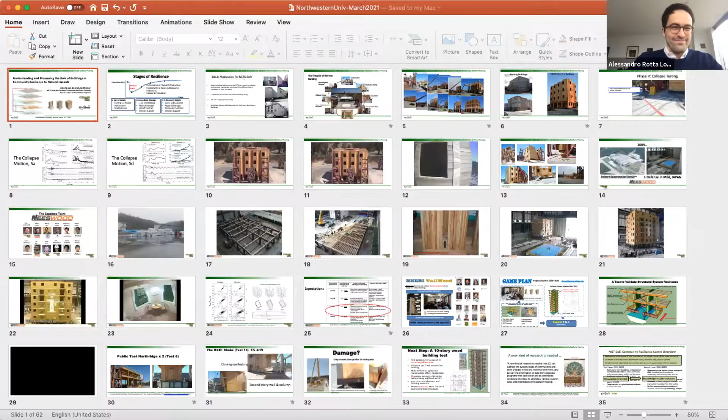All right, well, thank you for the kind introduction. And hearing that, I feel like I'm serving on too many committees now, so. Okay, well, thank you.

So I'm putting together a few subjects for today's seminar. I'll start with some of the NEESWood and NEES-Soft work, and the performance of buildings, and then move into community resilience and really talk about some of the work that's been done by the center. So a lot is my work, some is not. I'll try and distinguish that as I go along.

So I want to start with the stages of resilience, and these may look familiar. Certainly this curve that you see, and hopefully you can see my cursor here, the functionality. Obviously, if you're retrofitting or actively improving your community, then this could be going up, and then your drop is less substantial during a hazard, whether it's an earthquake or a tornado.

And within community resilience, we study all of these stages, and that's the immediate damage, which sets the initial conditions for the recovery stages. And those recovery stages become more social and economic, repairing, recovering, things like that.

So I want to jump back what seems like a fast 8 years, to the NEES-Soft project, whose full title was Seismic Risk Reduction for Soft Story Wood Frame Buildings. And this came about as a result of buildings that were built in the 20s, 30s, 40s in the Bay Area, around the San Francisco Bay Area. And locally, they put in place CAPSS, or Community Action Plan for Seismic Safety.

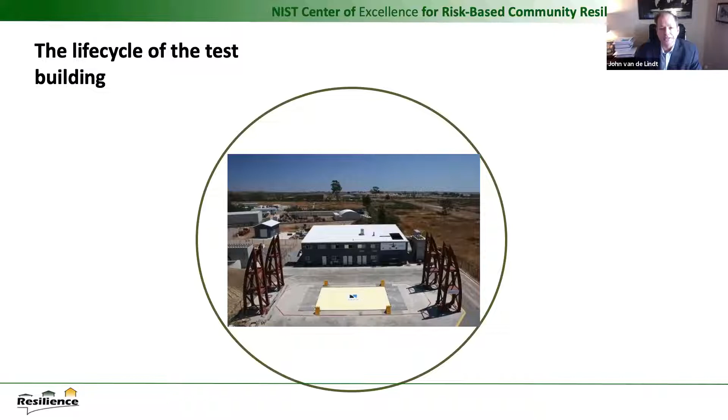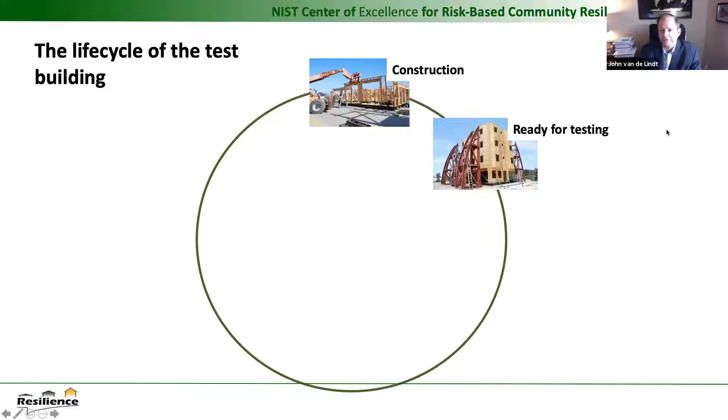There were 5 different tests, but ultimately we did a large test program at UC San Diego. That's the largest shake table in the US. And here you see this started with construction, and then ultimately ready for the testing. Cross-laminated timber rocking walls with one of the P807 retrofits. And I won't go through these in too much detail. I just want to show you the breadth of the project.

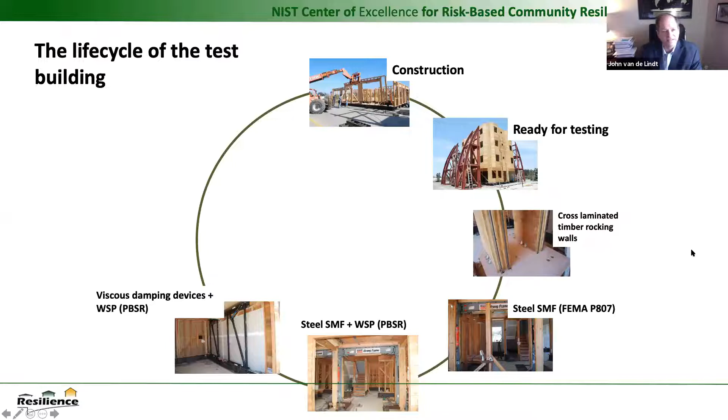The steel special moment frame. This was also what we call minimal level retrofit just at the bottom story. And then steel special moment frames plus wood structural panels. And various viscous damping devices. These were Taylor dampers, and then the frame was built by us. And then we performed collapse testing after we pulled out all the retrofits.

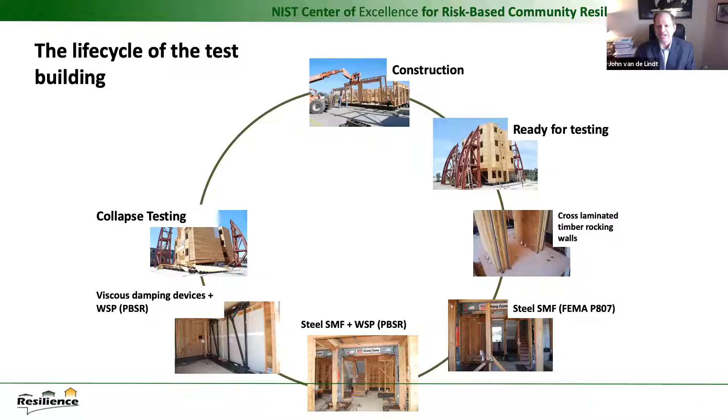And of course, I sometimes show the collapse testing first, and someone at one point had asked about the order, but obviously we do the collapse test last. And then recycling and disposal.

So just to show you the size of these types of tests, here you can see construction going up, prefabricating walls, and remember it's a soft story building, so you can see the opening, the 4 garage fronts on the bottom floor.

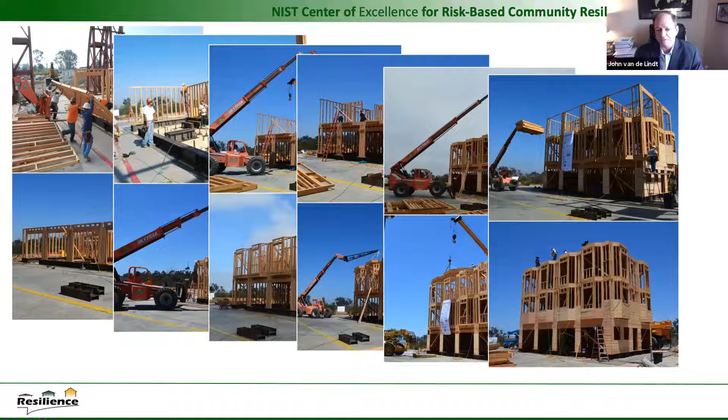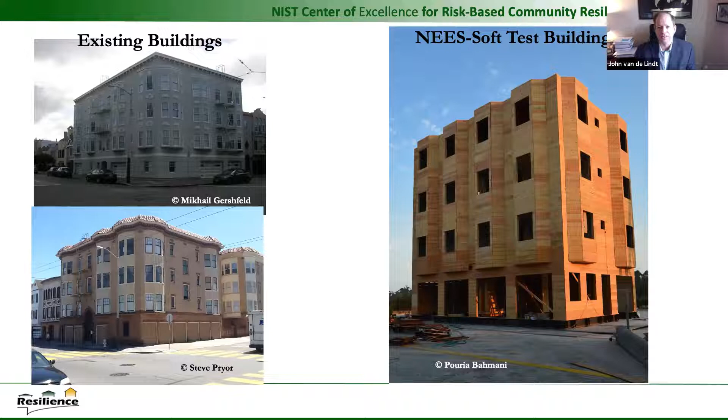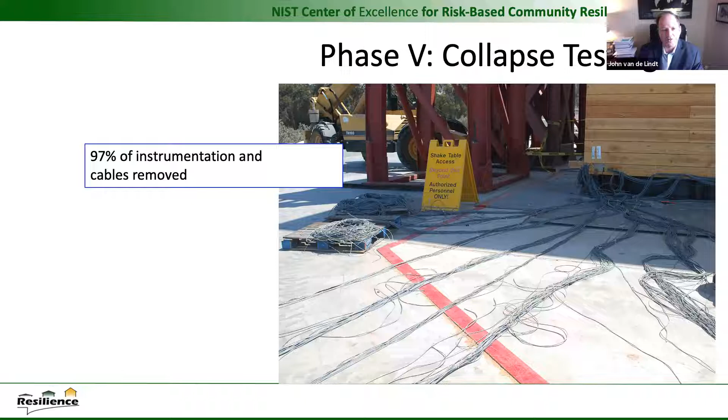So again, as I mentioned, I'm not going to show all the detailed retrofit tests. They were all very successful, but what I do want to show is the collapse test to show you how vulnerable these buildings are. And so to do this, we removed approximately 97% of the instrumentation. So there's 350 sensors. We leave about 10 or 12, a couple of cameras, and those are sacrificial.

Now, I think probably most of you are familiar with earthquake engineering to some degree. In order to select the collapse motion here, just to get into the engineering a little, if you focus on this, this is an MCE level earthquake, spectral acceleration of 1.8 G. And so for an unretrofitted soft story building of 4 stories, there's a period of about 1 second. So you can see how soft it truly is. And so you can see that from an acceleration standpoint, there's really no difference in these 3 California motions that were recorded.

But one thing I learned back working with Japanese colleagues at E-Defense, and I'll show that test in a moment as well, is that in numerical models, acceleration collapses buildings, but in reality, for a lot of these buildings, it's really displacement. And so it's critical, as many of you know, and many of you model, to get those large deformations into the models. And so now we're looking at a spectral displacement plot, same 1.8 G.

But what you see here is at 1 second, they're all the same. But then the minute it starts to soften and I start to damage this when I shake it, you can see that Superstition Hills climbs right up and triples its spectral displacement. So we selected that motion because we wanted to observe the behavior in collapse and calibrate models.

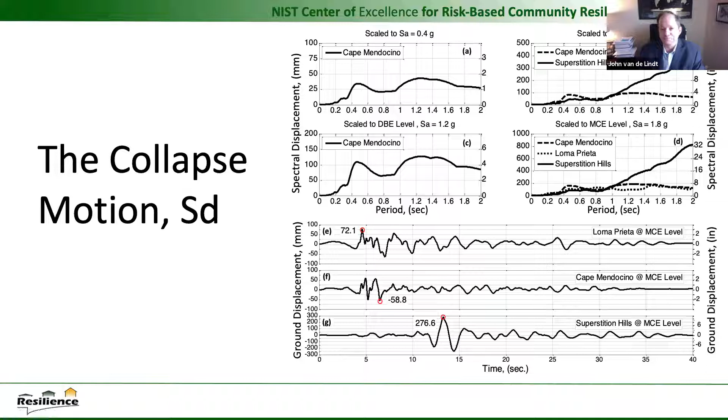So we've done 4 major tests to this point. Then we've removed all the retrofits, removed almost all the instrumentation. And so this is the first shake. This is Superstition Hills, and I don't know if you can hear the audio or not, but I'll try and talk over it. Okay, great. So it's a uniaxial shake table. They are upgrading it. This is seismic mass.

You'll hear the REU student, he's doing the recording from a lift about 85 feet in the air, I think. And even though he helped build the structure, he gets quite happy when it's being damaged. And so you can see here the soft story. These towers are here just to protect us. We're right behind in a 2-story; we're on the 2nd story of the control room.

And so here we're at about 18% interstory drift, and it's actually bearing on itself in essence. So this would be a building that would need to be demolished. This wouldn't be repairable at this stage. But we did want to model the collapse.

So same earthquake again, Superstition Hills 1.8 G, and then keep in mind this little camera right here. This is looking into a room that was furnished. You can't see it from here. And so this, in essence, allowed the calibration of a number of models.

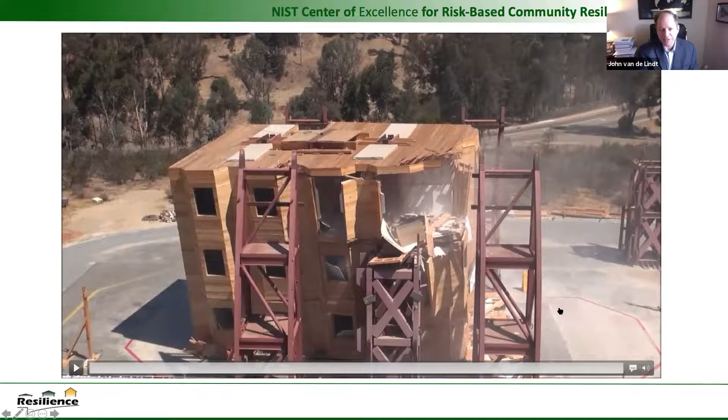And so now I mentioned that camera. So now we're looking into that room. You can't see it, but there's a kitchen table and some things in here. And unfortunately, it was a 10 a.m. test, so the sun is directly behind, and we didn't think of that when we planned to put the furniture in. And here you can see people watching from a distance.

And so this is that camera that you saw. This is the same shake, but this is the camera that's on that tower. And this shows you just exactly.

And so this is the result. And of course, here's the various furniture that was put in there. And the idea is really to get, I'll show you in another shake, the idea is to get a visual on the accelerations and things from a human perspective.

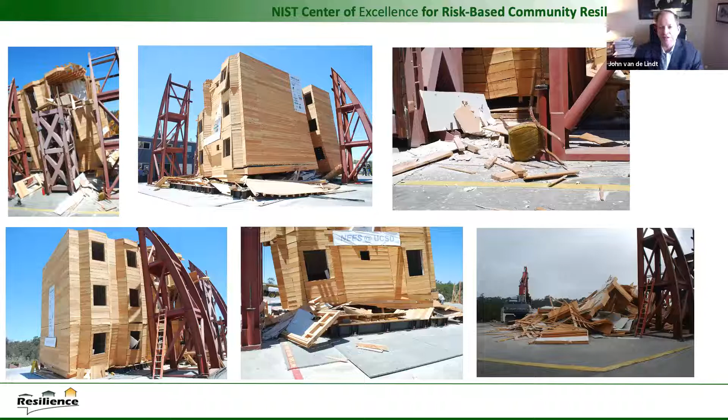Okay, so now let's rewind 4 years to 2009. So what you observed there in NEES-Soft was a building that's vulnerable. It is not resilient, and it doesn't contribute to the resilience of a community or an urban area. So now, rewinding 4 years, this was a project, the NEESWood project, development of a performance-based seismic design philosophy for mid-rise wood frame construction. And so the idea was to go up to about 6 stories. At the time, we thought 5 or 6.

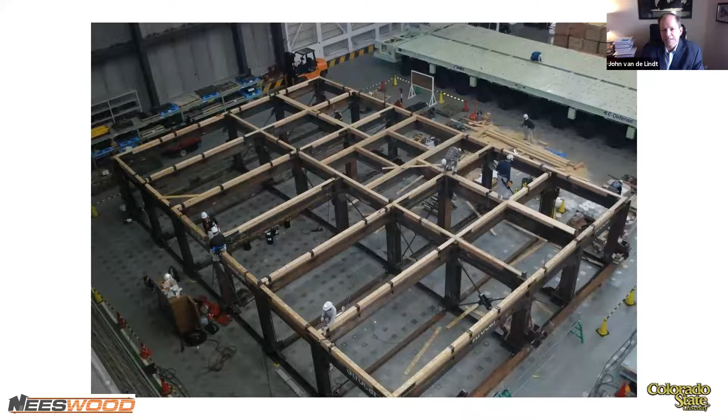And this is the world's largest shake table. So this is significantly larger. It's about 50 by 65 feet and has a payload capacity of about 2.4 million pounds. This is just the team. I wanted to give a call out to everybody that participated and lived over in Japan for that period. So here we see this is all the wood shipped from the U.S. and Canada, and I think I've always mentioned this just because of the memory, but the first day you start, it's always raining for some reason on these tests.

And so here you see this is a steel special moment frame. Simpson Strong-Tie designed this, and it's going to double actually as a lift frame. So we're going to use it as a giant space truss and lock it down, and we're going to lift it onto the table. If the building wasn't so tall, we would be able to use this approach, and you can drive. This is a building mover. They drive it under the buildings outside, and then they bring them in. But in our case, we had to lift it with 2 cranes.

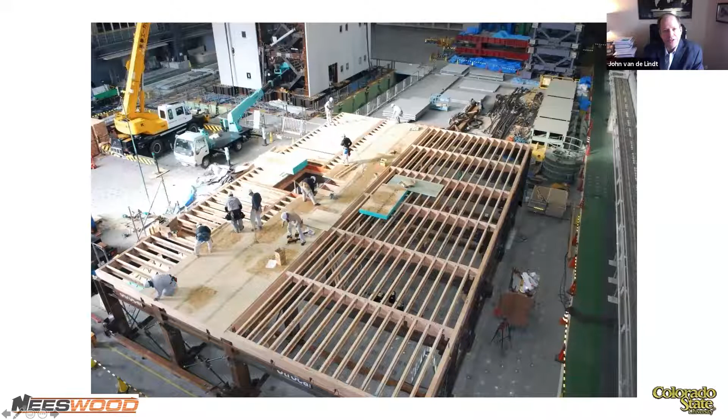And so this is the wood interface. And here you'll see these in a second. These are cages that will capture steel tie-down rods that go up the height of the building. So here's the construction going, another test going there about weekly. So the steel moment frame would be under here, and then these are the rods, and this could be probably a 1 5/8 or a 1 3/4, it looks like, and this goes up, and the color indicates that this is a very high strength rod.

And this is a stud pack, and the stud pack is at the end of a shear wall. So I know it looks almost like more than a stud pack. It almost looks like a solid wood wall. And this is where, I won't be talking a lot about this, but this is where we got the idea of maybe moving to cross-laminated timber for these taller buildings, because that's almost what we're looking at here. And so this is going to take compression and then the rod is going to take all the tension, but it's free to slip down. It bears, but it's free to slip down into the cage so that it doesn't buckle.

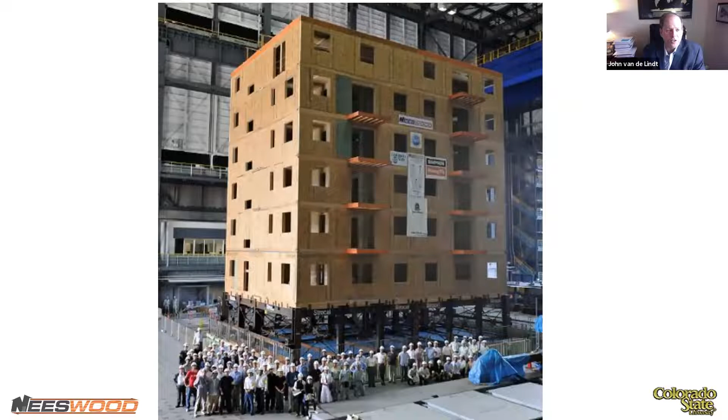So here we see maybe 6 stories, and we're getting ready to move it. I think this bridge column test was right before us. So this is the big test day. This was July 14th, 2009. Days somewhat etched. We had about 600 people in the audience that day. And this is the damage inspection team, as well as the project team that you just saw, the 8 or 10 people, a couple hours prior to getting ready for testing.

Okay, so this is a building that was designed to perform well, and it was designed to have minimal levels of damage in an MCE level event. So what you'll see here is this is a triaxial shake. It's 180% of Canoga Park scaled at the spectral acceleration first period. I think it was 0.49 seconds. So it's fairly stiff. You can see the 4-story building from before had a 1 second period. This is a 6-story building with about a half-second period. But this also has a lot of detailing in it with the steel rods. They were designed to control rod elongation, things like that.

And then it was done with direct displacement design. And that was an extension of the Priestley work that was developed back during the PRESSS project, but then it was extended into wood as part of NEESWood. So here we see, keep in mind, it's a triaxial shake. You can see some people standing back around, and there's a little bit of lead time here because of the countdown.

So now you can see it's triaxial. We get a little bit of accidental torsion in there. And that was really one of the conclusions, is no matter how symmetric everything is, you don't really know that it's symmetric. That was just a minor conclusion, and so you can see, fairly stiff. What you're looking at is on the order, at the 5th story, of about 3.5% interstory drift.

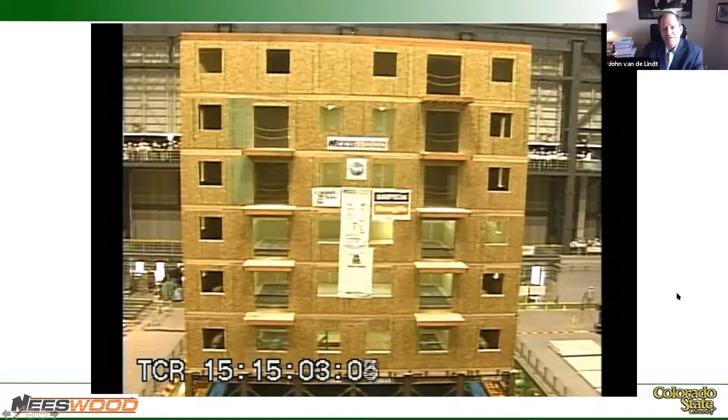And so that's pushing about 2G of acceleration, but it occurs for a very short time. So like some of you probably know, sometimes if the acceleration is not sustained, although you can see some of it certainly sustained, but if it's not sustained, then it may not be as damaging. In this case, it was enough to flip things.

So to look at some of the engineering results, here you can see, it's a fairly large building. Here you can see we had a peak force. So this is seismic test. This isn't story. This is seismic test 1, 2, and 3. And so this was more the 72 year, the 475, and then this was our 2500 year MCE level event that you see here.

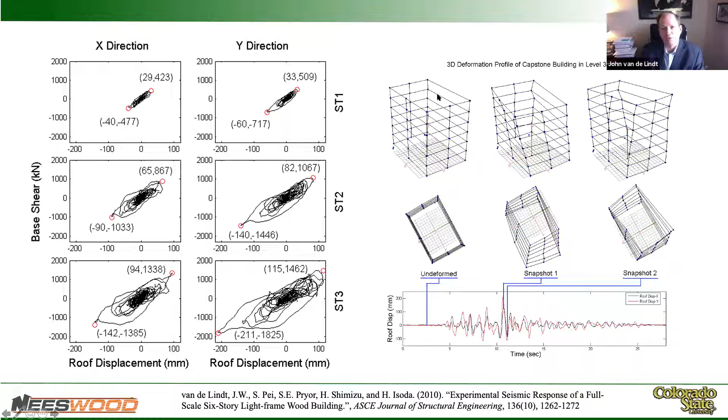And so here we got about 1,825 kilonewtons for a peak force and about 211 millimeters of displacement at roof level. And then we had 50 optical tracking sensors. So when it was time to test the building, we closed the 6-story doors for ambient sunlight. And then we were tracking with LED sensors, and there were 7 cameras, I believe, tracking this in 3 dimensions. We were able to get everything but one side. We would have needed 9 cameras to do that.

So the big takeaway, and this helped us understand more about mid-rise wood frame construction, but there was a number of conclusions and papers that came out of a test this size. But one of the big things was that when we did the 2-story test at the beginning of NEESWood, at 2 to 4% of peak interstory drift, we saw this type of damage. We saw splitting of sill plates, separation of gypsum wall board, even a portion of a ceiling fell, even anchor bolt failure, things like that.

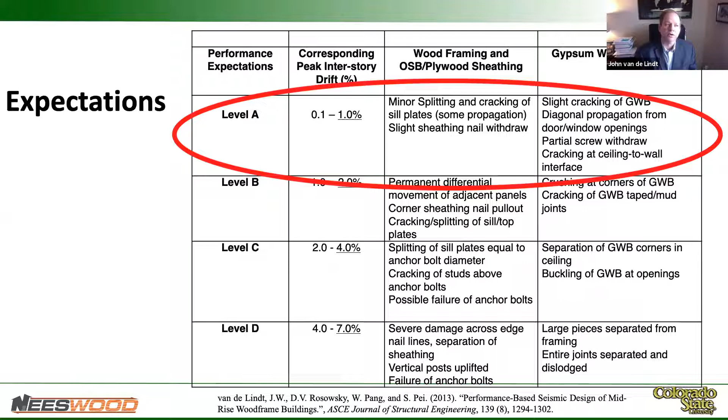Well, at mid-rise, what we noticed throughout the entire building is that at about 3.5% interstory drift, we were getting damage that was more in line with low-rise wood frame construction seeing very small drift levels. And the main reason is that these light frame wood shear wall stacks were almost acting like a system themselves. So the wall itself was racking, but each wall was also allowing bending deformation and rod elongation and things like that. And so we don't see the same amount of damage that we would see with a more pure shear response when we have combined bending and shear at the global system level.

Okay, so I want to jump ahead here. I mentioned that with those stud packs, we had the thought of cross-laminated timber. It had been used in Europe for a number of years. And so a former student of mine, Shiling Pei, who's at Colorado School of Mines, is the lead on this project, and I serve as a co-PI. This was a planning project for a few years, and then the NHERI TallWood project was funded in 2016. It was supposed to be finished, but with the ongoing pandemic and the upgrade of the NHERI shake table at UC San Diego to 6 degrees of freedom, we were given essentially a 2-year extension to test beginning in November.

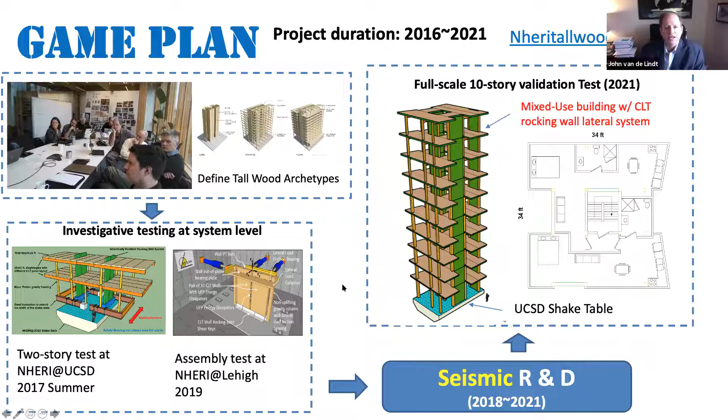And so the idea is that that'll be a test. You can see the shake table. This is that 25 by 40 foot shake table. It'll be triaxial, and the goal is to test a 10-story post-tensioned cross-laminated timber rocking wall building. And so these green walls, these are all PT rocking walls.

So this is a 2-story test that we did in San Diego in 2017, and the idea behind this was to test the concept, make sure that we got all the wrinkles out, and probably spend too much money, because now we're scrambling for that, but that's par for the course for these large tests.

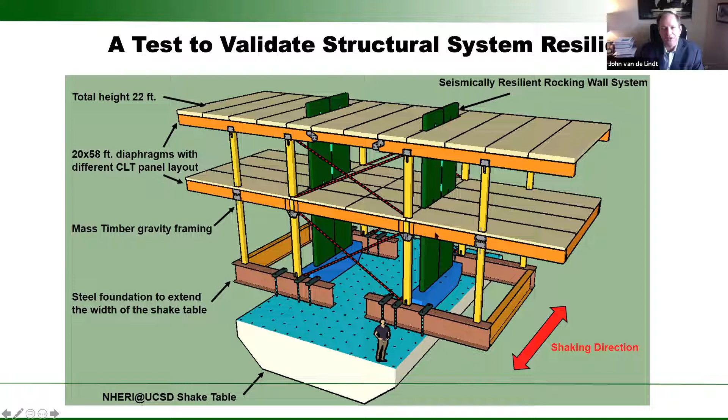And so here, keep in mind that the shake table is uniaxial, and this is a somewhat professional video, actually, that was developed by the UC San Diego NHERI site for us as part of that test. Hopefully it's not too loud. I'll play this, and I'll do a little narration as we go, because there's no narration. It's just some nice sound.

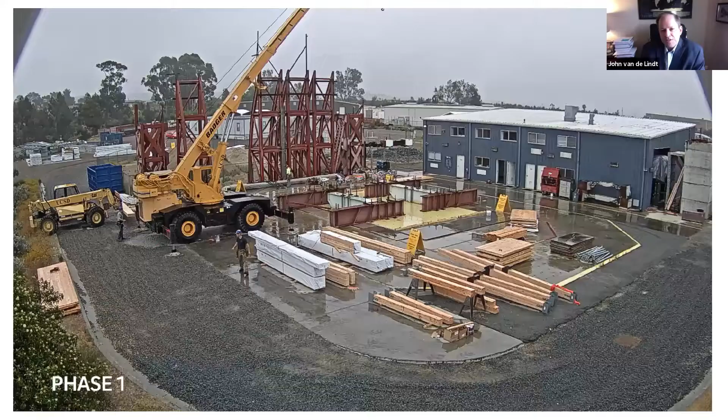And so I mentioned it's always raining on the first day, you see. So that's why I said that. It's true. I think if we could not work outside, we'd get away from that.

This is that 2-story building I mentioned on the 4-story test. So we're sitting right here in the control room. And then you'll see construction. I think the video is about 2.5 minutes. So here we're putting up posts, and one floor is going to be just cross-laminated timber, and then one is going to be cross-laminated timber, but we're going to do a light concrete overlay on it.

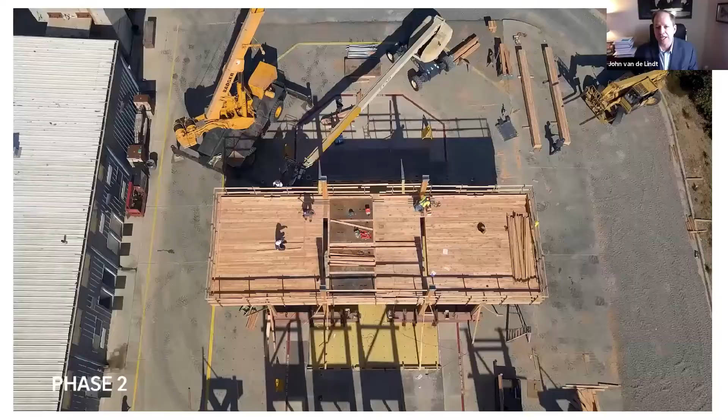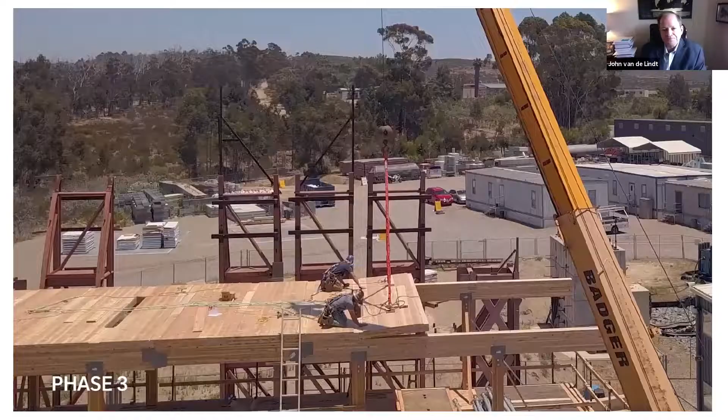And that's just because these buildings, unfortunately, tend to have a lot of different parts and tests going on within them because they're fairly expensive for one PI. So we have big groups come in. So here you can see this is cross-laminated timber if you're not familiar with it. And so they're laying these big panels. And the building has a very small dimension here because we're shaking this way. And then it's cantilevered out on the sides.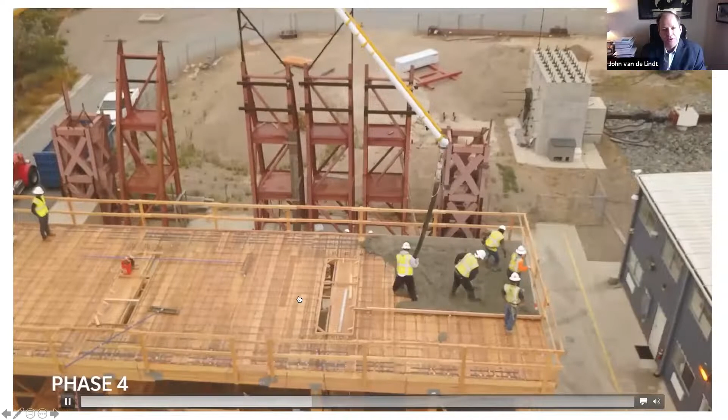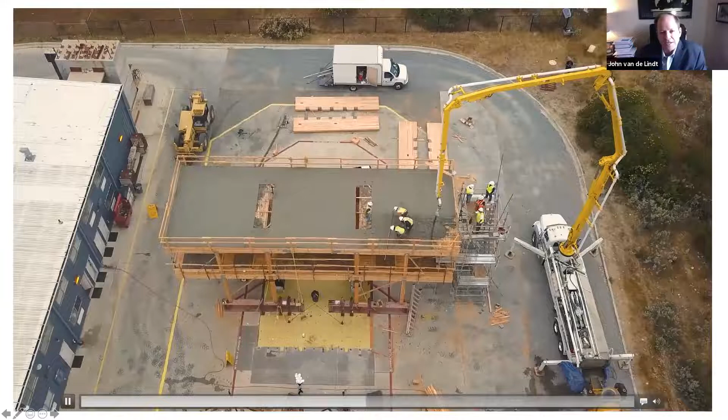Okay, so here's the concrete crew. You can see our rebar, and there should be some shear. And then the rocking walls are going to drop down in here, so that's why there's nothing here. And this is where we're going to put steel transfer plates, and I'll show you those in a second. And the idea of those transfer plates is that they don't transfer any uplift. They're only going to transfer pure shear.

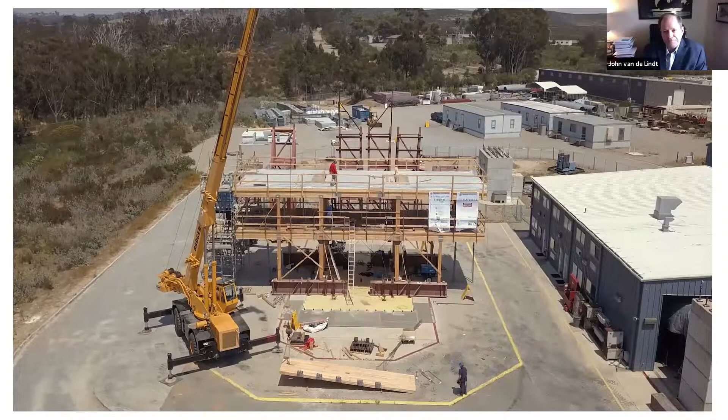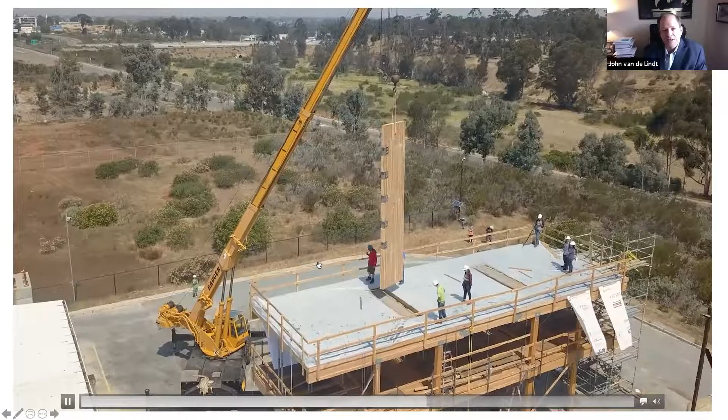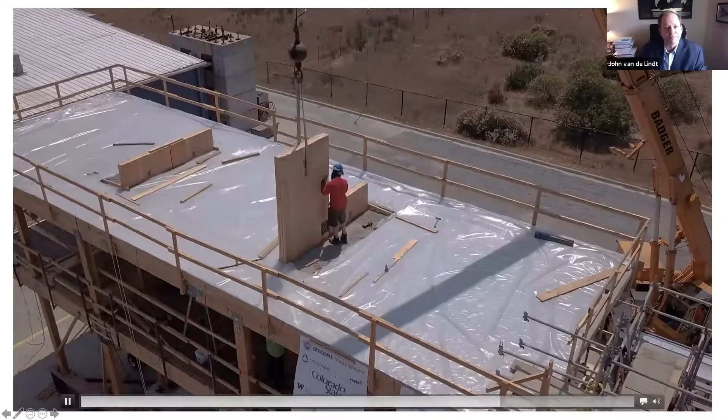Okay, so here's our post tension. That's half of the wall. They're going to be coupled right here with, I guess, 5. It looks like you'll see those come in. And then that hole you saw in the middle, that's where there's what we call a steel tongue, which is basically going to go in and just transfer shear like this right here. So this is the roof level. This is the second story, I guess. And then they're going to couple right here with the UFPs, and that's just taking some of the bending. So you'll see them in a second. They do this basically.

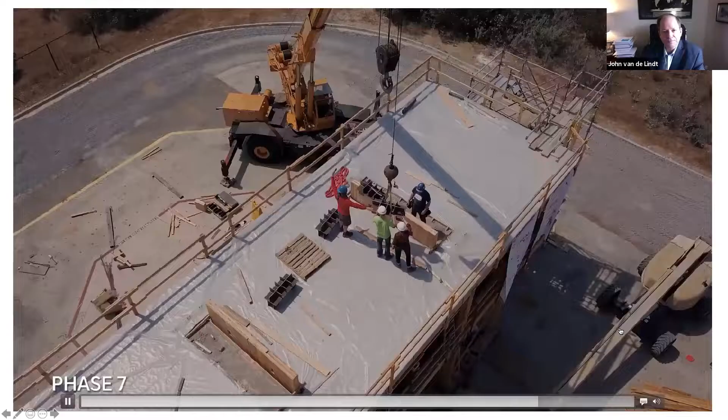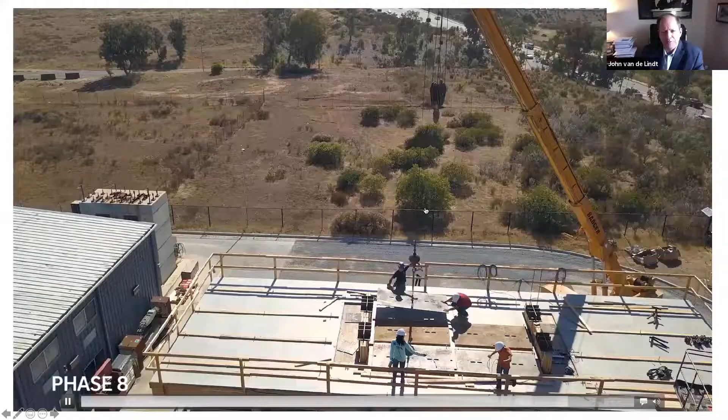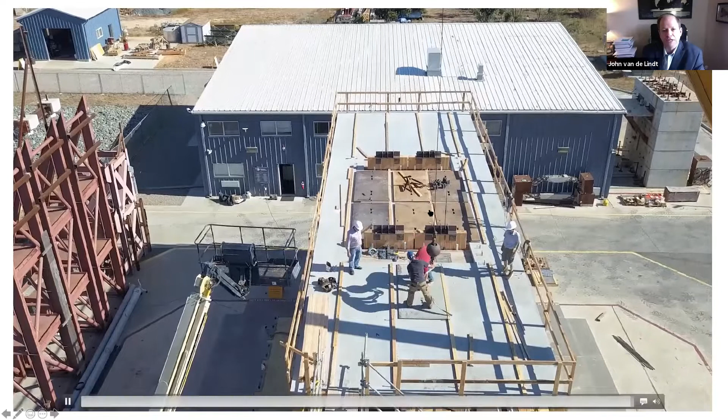And then this is the cage up top where the post tension's gonna come down, and for a structure this size, about 100,000 pounds, I can't remember exactly, 120,000 pounds maybe, the post tensioning is actually not that significant. We were able to do it with wrenches. For the 10-story building, that won't be the case. And then there's steel plates throughout. The steel plates are going in to take it up to seismic design mass or weight.

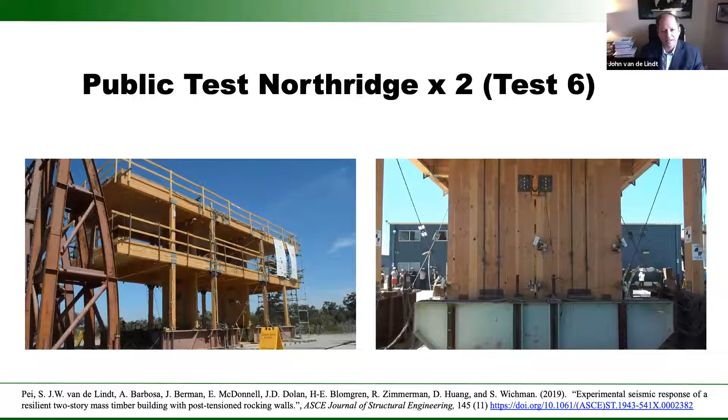And so this was the public test, so this wasn't extremely high intensity. I believe it was as recorded, so it was a little bit more than a DBE, but we did run it twice. And I'll jump to the next. So here's a close-up of the rocking, and this is just to keep it from trying to walk. In reality, you could have something that looks a little bit nicer. And then you'll see again a double view here.

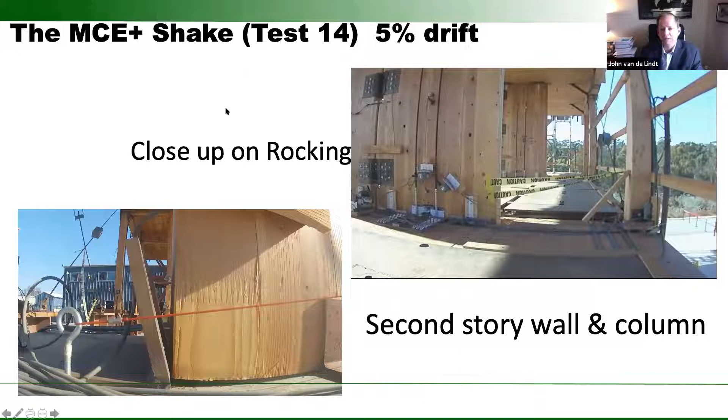And here you can see it rocking. And everything was designed as pinned. So essentially the rocking walls are providing pretty much everything. And the idea is that this was resilient and could go through test after test. And in reality, by the end of this, I believe it went through about 26 shake table tests, including tests in excess of MCE, without any substantial damage, actually without really any damage. You can see a little bit of crushing here, and this is quite a few tests in, as you can imagine.

Yeah, and so cosmetic damage after, that's right, it was 14 earthquakes for this one, and then we replaced the wall with a different type of system that was proprietary for a different group, or somewhat proprietary, I guess you could say.

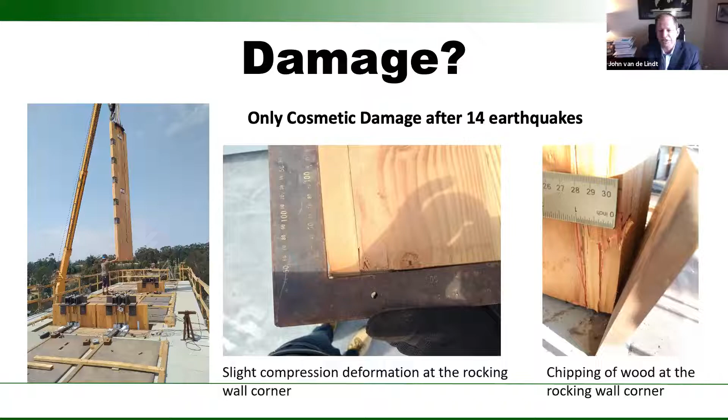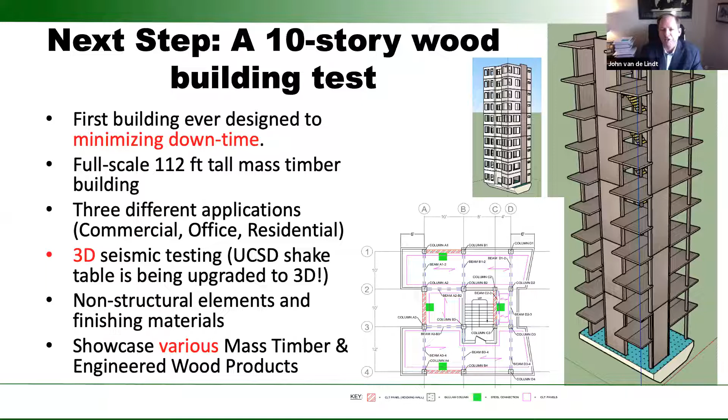So the test coming up, it'll be 112 feet tall. We're waiting on the shake table to be upgraded to 3 dimensions. It'll be a 3-dimensional shake, and we're showcasing various mass timber and engineered wood products. And so we expect that to be a resilient structure.

So I want to spend just a few minutes now and get into communities. Why do we need these buildings? Well, the National Academies had called for a new kind of research, something that can address the dynamic state of communities, modeling or assessing changes in risk and resilience over time, taking data from disparate programs, bringing it all together, and then linking research and data with decision making.

And so the NIST Center of Excellence for Risk-Based Community Resilience, which I'm fortunate enough to be the co-director of, in the first 5 years, we completed this a little over a year ago, and we were developing an open source computational environment to study community resilience that can ingest these types of building models, as well as other things that I'll explain.

Standardized data ontologies. We didn't get as far with that as we would have hoped, but we have a data workshop coming up in 10 days, and so that's progressing. And then a comprehensive set of test beds and hindcasts.

In the second 5 years, we had the renewal about a year ago, we essentially went from knowledge creation to what we call knowledge implementation. In other words, how do we transfer the use of these models into communities so that communities in the US and around the world can become more resilient to natural hazards?

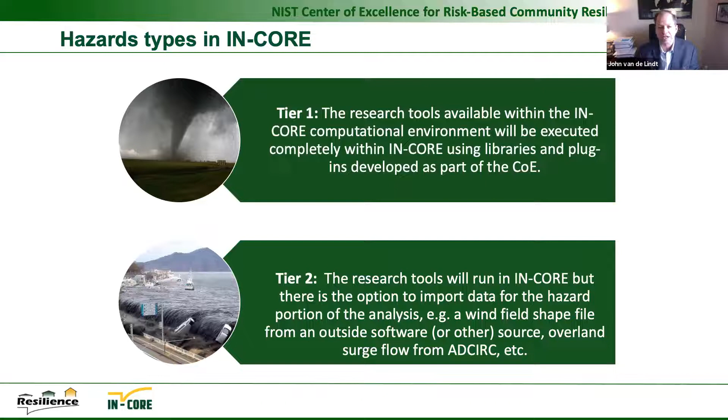There's two tiers of research tools specific to the hazard. One is within IN-CORE, and it can be just a click, I want a tornado, or click, I want an earthquake at this distance, and it uses attenuation and things like that. Or you can use more complex software, develop it yourself, and then bring it in as a raster file or something like that. And so there's different mechanisms.

So we have these 3 thrusts that I just mentioned. I won't go back through them in the interest of time, and then 6 major tasks. And of course, IN-CORE is perhaps the largest. We look at outreach and sustainability. That's intended to be the sustainability of IN-CORE, how IN-CORE goes past the years of the center so that it can be used. And then mitigation and recovery, which is the optimizations, the economic models, policy portfolios.

Verification and validation: it doesn't mean anything if it's not checked. I think we all know that. First thing you do is check your answer when you do a structures problem. We do the same thing. It's just really hard to check it at the community level, as you can imagine. So we do try and do hindcasts.

And then complex systems, ports, railways, schools. I think schools is a great topic right now because it's so complex. What makes people go back, what makes them make certain decisions to go to a school or not go to a school. Those are human interactions, so we use agent-based modeling for that. And then interdependencies, uncertainty modeling, and a colleague that some of your professors know, Paolo Gardoni, leads that last task.

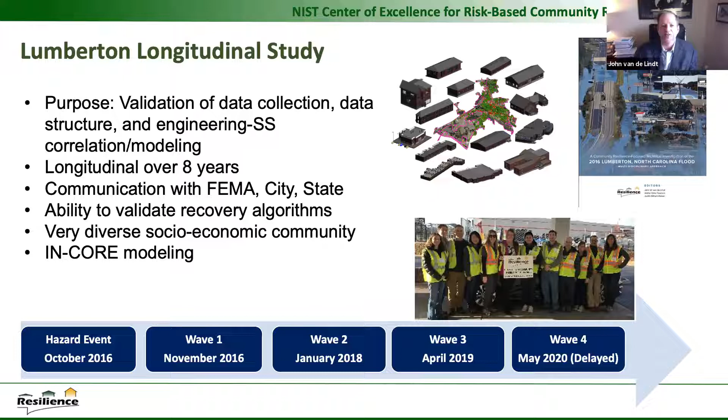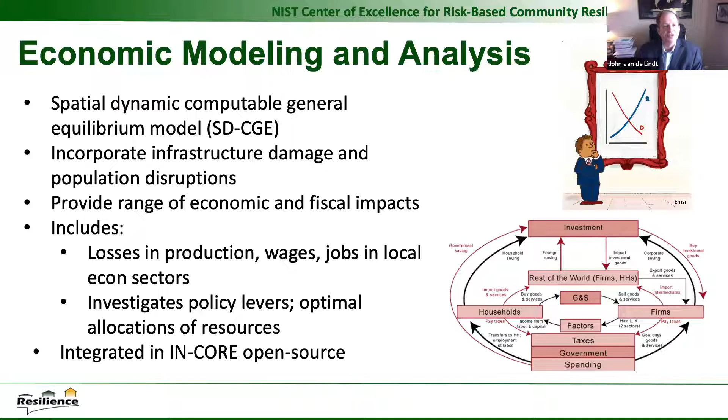And then social science modeling, looking at population and employee dislocation, housing restoration and recovery is huge, and business interruption. And so there's tools that do take census data and do synthetic population allocation and things like that.

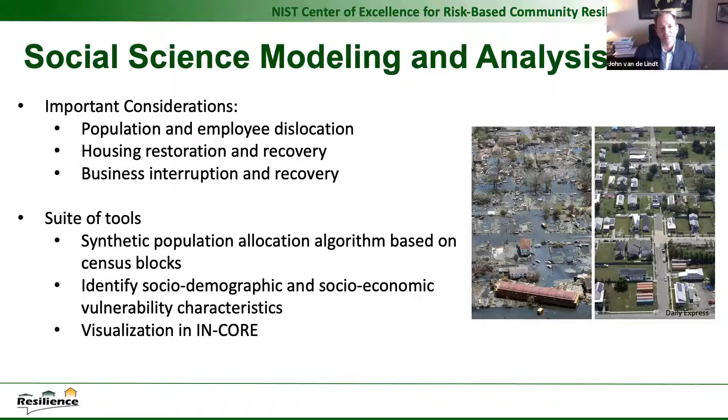And then, as I mentioned, the interdependency, the uncertainty, and the scalability. We can't model every person, at least not efficiently. And so how do we scale, and what resolution do we operate at so that we have enough information and don't introduce uncertainty and can make, or at least recommend, an informed decision?

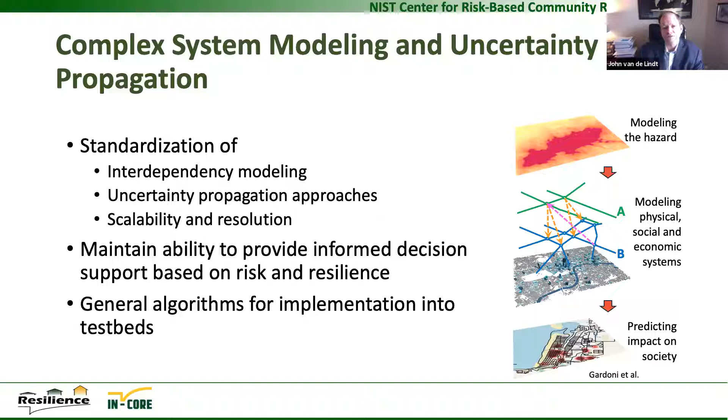Okay, so I believe this is our last video, I promise. So just want to show. So this is the basics. This is from about 6 months ago, so it's come a little further now. But so IN-CORE operates with PyInCore. It has web services as well as web tools, and then the IN-CORE Lab, which is Jupyter Notebooks, many of you are familiar with, and so we can look at the buildings within, and so this is Joplin, Missouri.

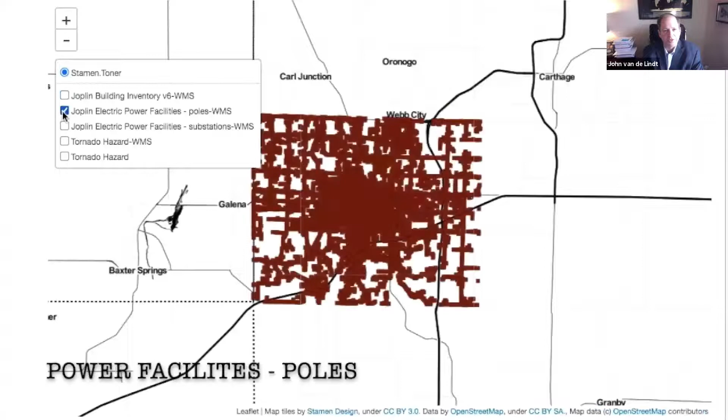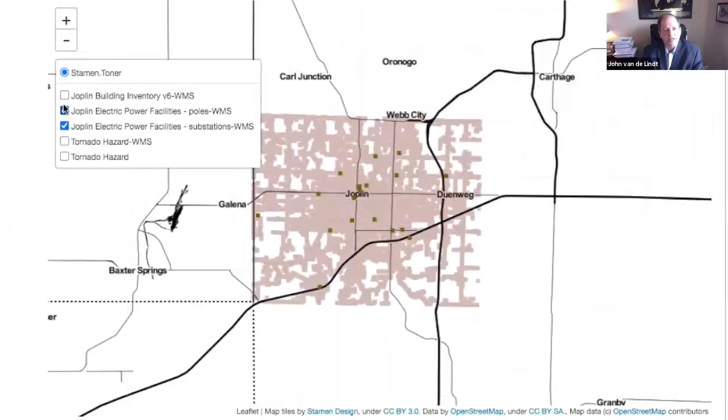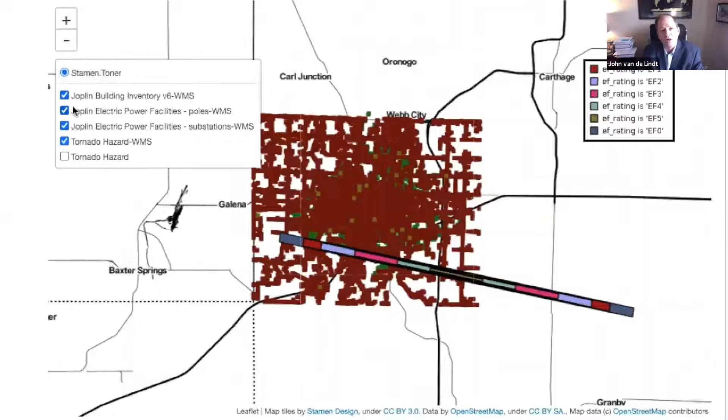We can look at the buildings. We can look at the electrical power poles. So this is every pole, thousands of them. The substations as well. And the graphics aren't great here. I'll show you the real graphics here in a second. And then we can put a synthetic tornado. So that would be that tier 1 tornado, or we can also overlay the actual tornado that hit Joplin, and that would be a tier 2 level analysis where we're bringing in a raster file.

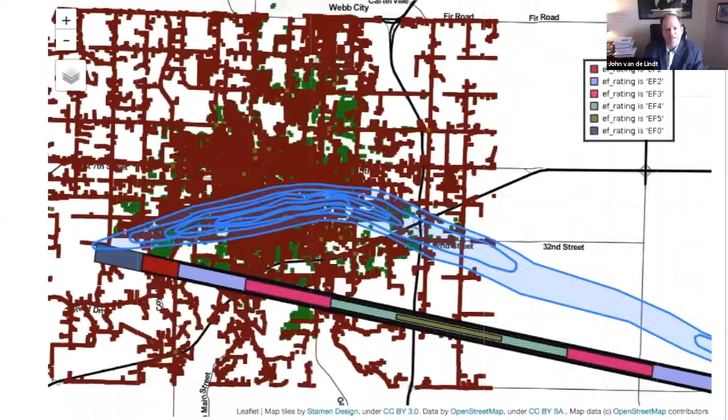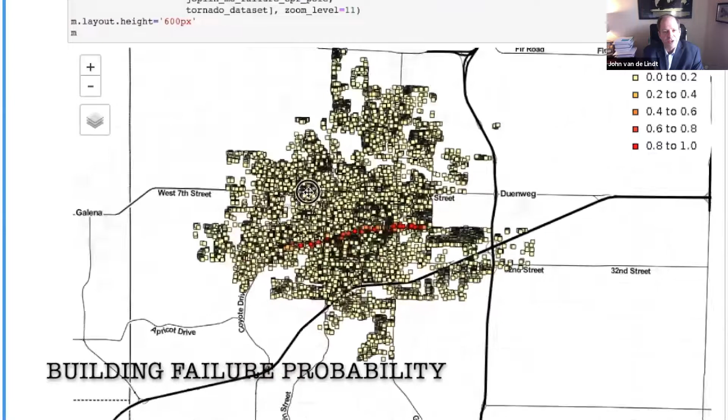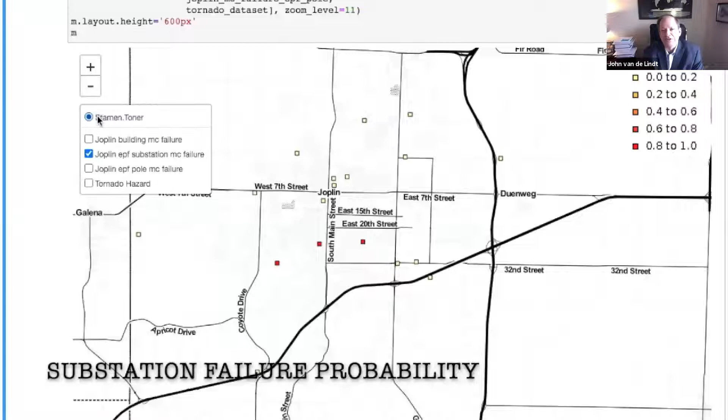And then we can do the damage analysis, and here we see the level of damage to the buildings, and it's at the resolution again. I just mentioned resolution, but it's not great there. And then the probability of failure of substations, and of course those with dependencies, and so those are coupled to different service areas. Here we see that tier 2 tornado being overlaid. And we'll pull that out, look at damage.

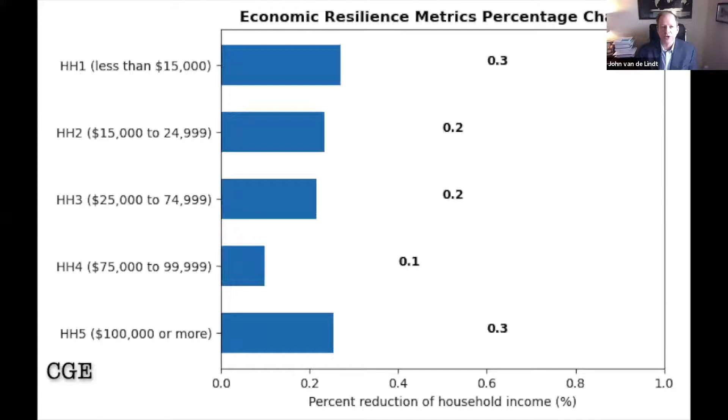And then we can couple this with the capital stock shock, which is the computable general equilibrium model, and we can see the change in different household incomes. We can see percent of reduction in employment, and then we can also look at the population dislocation from the tornado. And what you'll notice is that there's population dislocation due to changes in employment and things like that outside of the damage area, and so that's where you start to see these different interdependencies.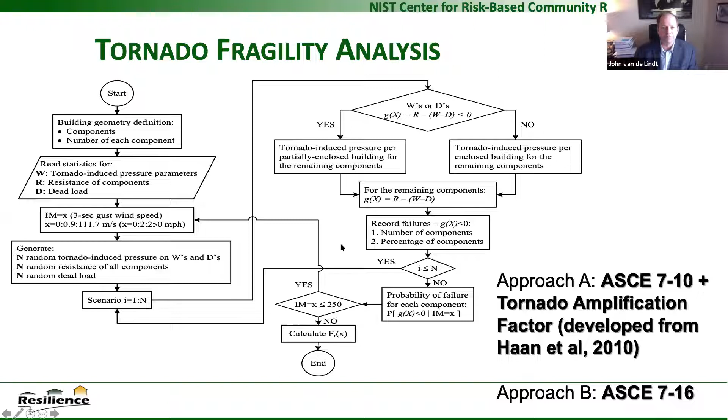And so how do we model this? Well, we develop fragilities. Many of you are familiar with them, certainly from seismic work. So we would go through. This is actually part of Joplin. We would look at building footprints, and we pull out buildings. So here you see a small house, actually not that small, I guess, and then we would map the fragilities. And so we have a portfolio of archetypes that then gets assigned to these. So we're not analyzing the buildings, we're analyzing the archetypes for those buildings.

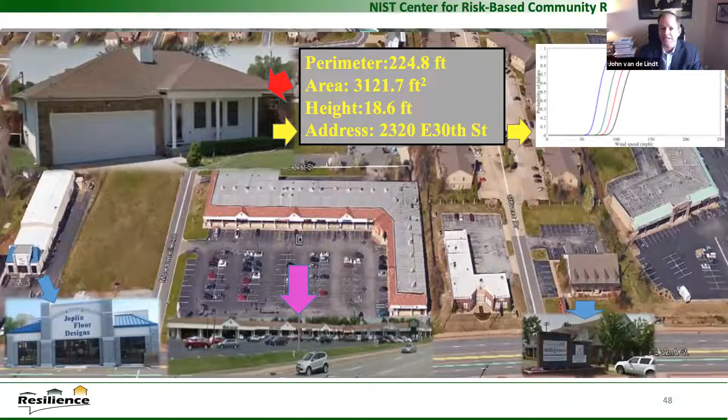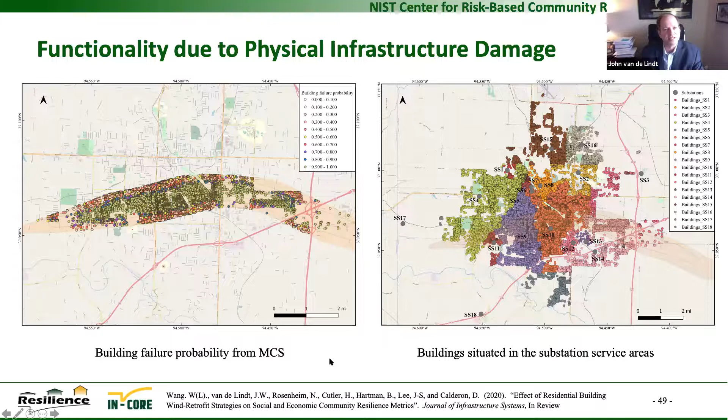And here you can see it's color coded by archetype. And so this is more the graphics that are in IN-CORE. This is what you would see, not like you saw earlier. And so here are the buildings related to each substation, 18 substations. And then here we see our levels of damage from Monte Carlo simulation, things like that. So this is the structure of IN-CORE. This is what we call the conceptual structure.

And so what I just showed you is this portion. And so you're seeing the built environment, the social systems, the economic systems, and then the damage that overlaid the wind hazard, the fragilities, the damage. And then we didn't talk a lot about functionality, but that was embedded in there. And then it passes to the CGE model, which is the economics model, the social science models.

And so what I'll show you now is how we step through time, and we can step through and see recovery, and we can then record metrics over time. Things like percent of people that remain in their homes or that can remain in their homes, changes in household income, employment rate, earnings by different sector.

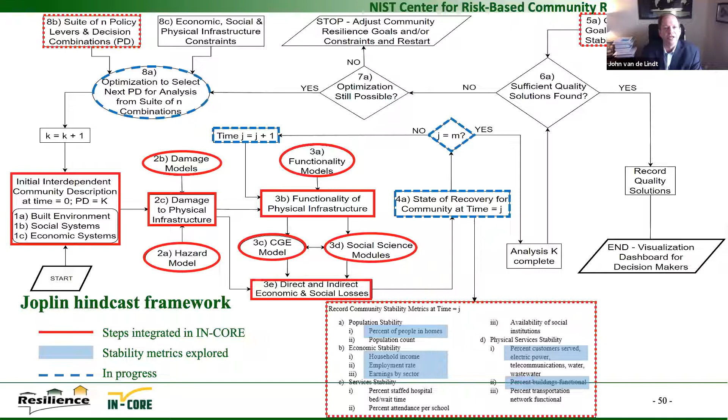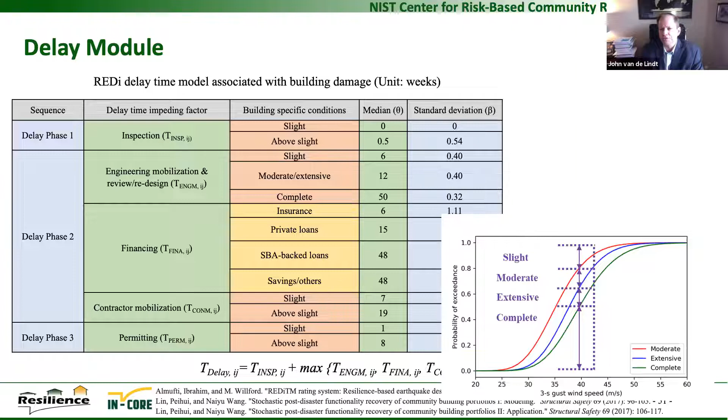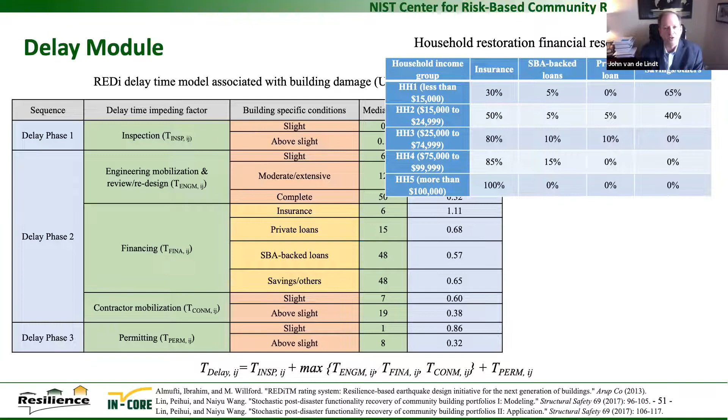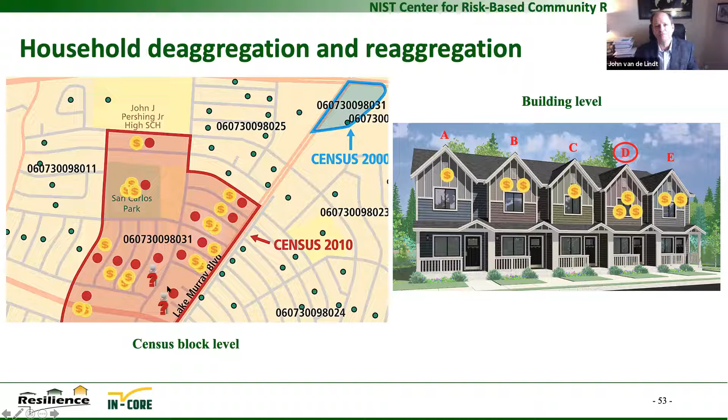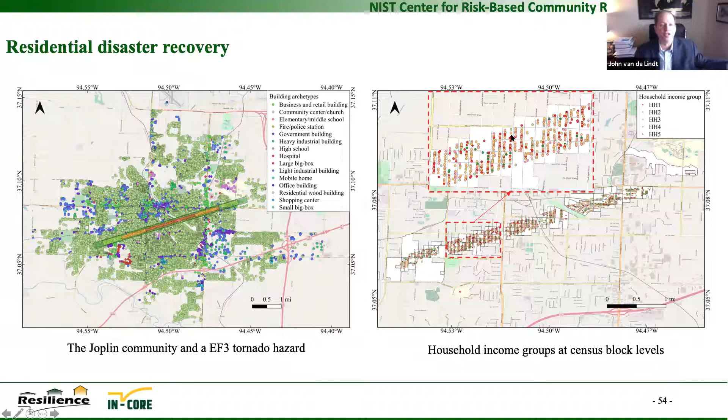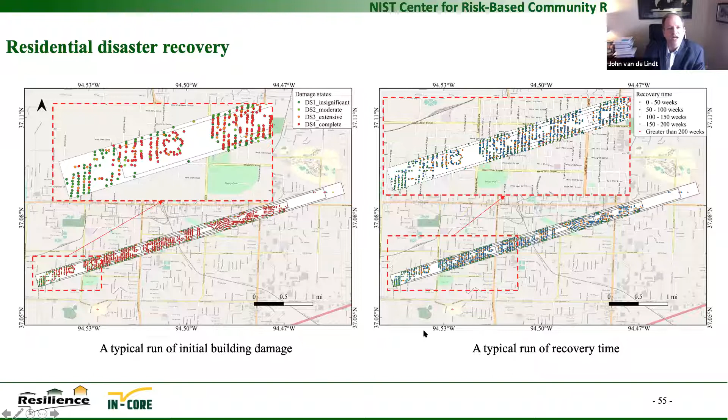But what happens is these are the people that become homeless, and these are the people that need resources from either federal or state or local, things like that. Whereas here we don't see that. We see everybody recovered after a few years.

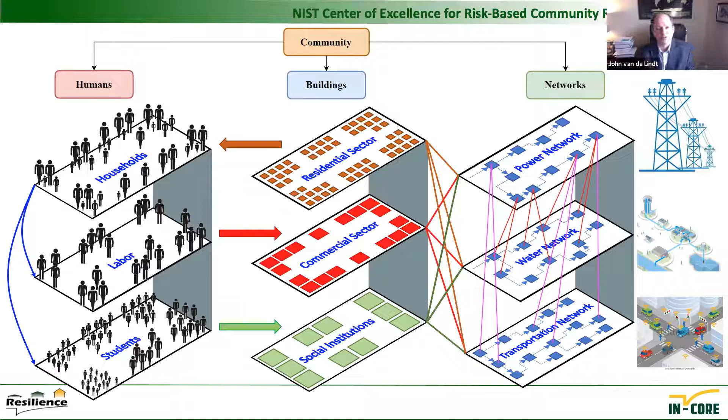And then looking at the residential sector, which I showed there, but then also business recovery, which is coupled with residential recovery. It's coupled with many different things, not just damage. And then social institutions like schools and hospitals and things like that.

And so just some closing comments. Community resilience is a complex and interdisciplinary endeavor. At least I hope I got the point across of the interdisciplinarity of this. It requires hazard modeling, modeling of buildings and their interactions, network modeling, modeling of economics, social science modeling, and many of these we as engineers can do, but this part we're not versed in, and so it requires those collaborations with scientists that are specialists in that area.

And then ultimately the workflow is required to enable the input and output and the communication of all of these algorithms and the model interaction. But the big takeaway that I want to leave you with is that no single sector has the ability to represent or model community resilience, but each of them is critical in and of itself, and that includes buildings.

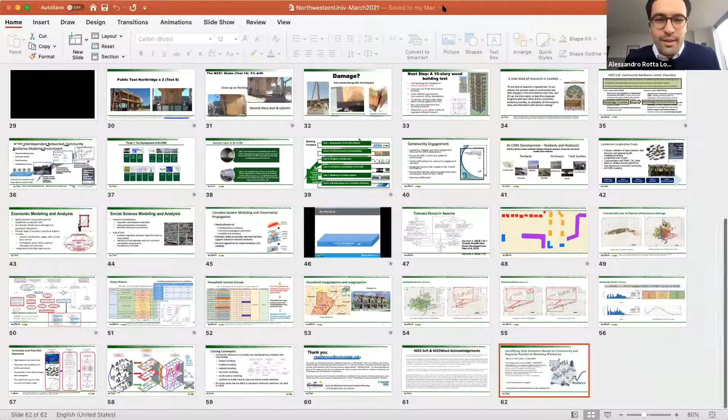I have a question. Yeah, go ahead. In the first part of the presentation, you were talking about the shake table tests, and you made the comment about how you're doing the 10-story with mass timber. So I was curious. It seems the NIST Center and a lot of your work is focused on the resiliency of the structures and of the cities, which was a very good presentation, by the way. I thought that was very interesting.

But one of the reasons mass timber has become more talked about, used, and well known is the sustainability aspect. And I'm curious if you've seen any sort of conflict, so to speak, in trying to make not only structures, but the overall city more sustainable versus also trying to make it more resilient. Have you seen that sort of conflict in your work? Yeah, thanks for the question. So if I'm understanding, you're wondering because presumably to get the buildings to perform better takes more material. Sure. And so that's kind of the question.

So for instance, I know that for mass timber, a lot of the tall mass timber buildings going up now are hybrid buildings with concrete. And so there's sort of a balance, because you don't want to over harvest the forest. So to preserve the sustainability of a mass timber building, it's sometimes necessary to include concrete, which is a less sustainable material. So I'm curious if that sort of balance exists from a resilience standpoint, where in order to preserve the resilience, you need to sometimes sacrifice the sustainability, so to speak.